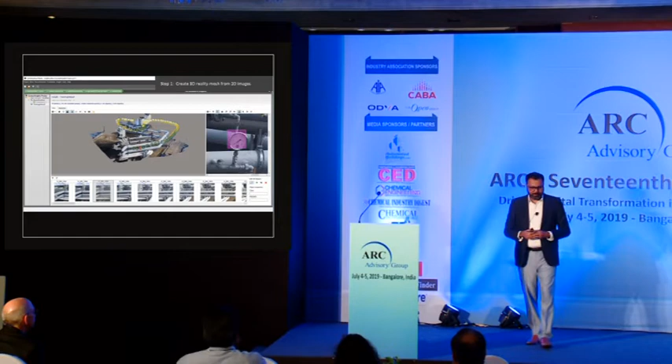And then we have added artificial intelligence and machine learning on top of it. What it means is now that I have a reality model, I train my system to identify objects and classify them correctly. So for example, what you see on screen is I'm defining a volume and saying this is a butterfly valve.

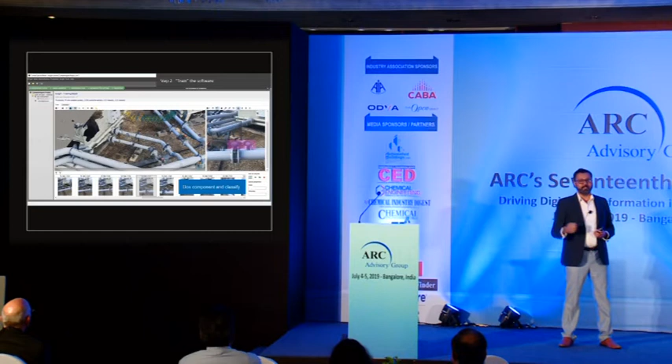So I'm defining it's an asset class - it's a pump, a valve, a control valve, a pressure indicator - and I train the system to do that. Once that's done, and I use machine learning to train my system, then the system automatically goes into the model, starts reading and getting information from that.

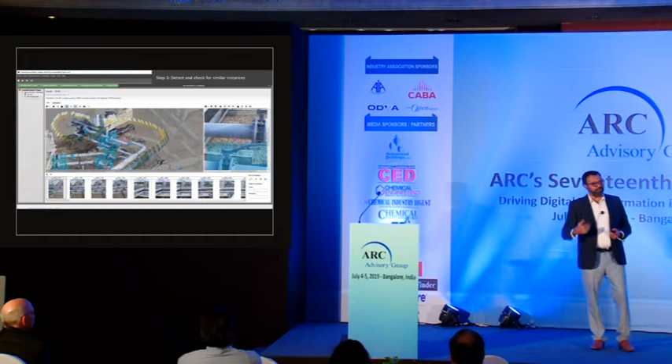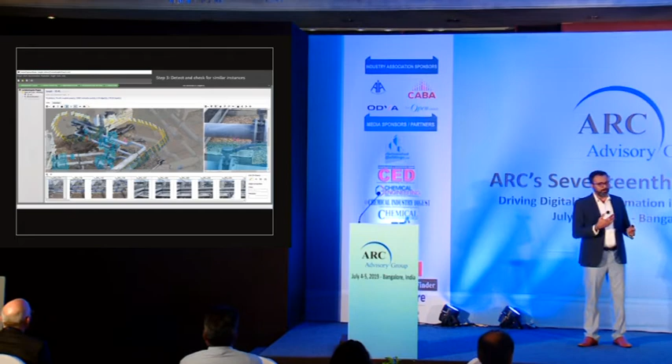Now it understands I am a valve, okay? It understands I'm an equipment, but what is my tag number? What's my functional location? So there we leverage your nameplates and tags embedded on your equipment, extract that information and define an asset object to it. So now we know what object it is, we know what class it is, and that information is tied back into a digital twin to link to information coming from various sources.

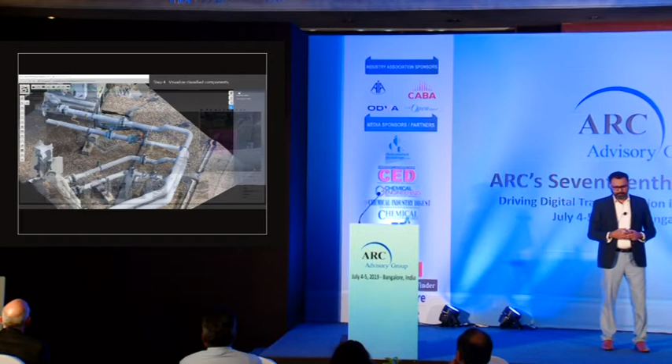Here's an example of that classification happening. So I'm on a reality model. I can look at a butterfly valve and the object selects everything you see, it shows me in pink. So that pink shade is all the butterfly valves which the system automatically scans and identifies back.

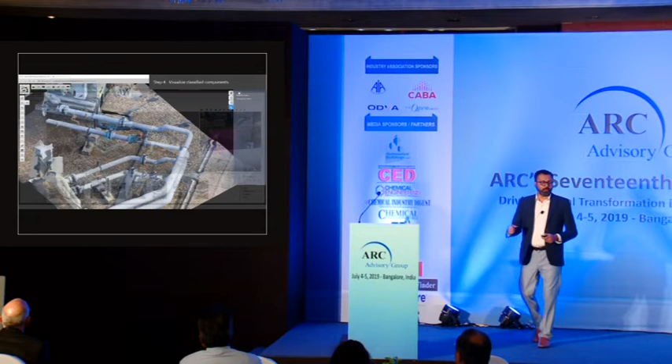So once I have my digital twin information and information extracted from these silos, then comes a point of aggregating this information. I can start with my plant breakdown structure. If it's a brownfield project, I can go to my CMMS systems, my SAPs, to bring that plant hierarchy. So I have a ready-made hierarchy I can start using, and then start aggregating information from various sources back, for example data from a P&ID and 2D information from a vendor data sheet.

It will be able to match and compare information. If there's some data inconsistency, it will highlight it and generate reports, which I can use for decision making in terms of what information is correct, which becomes a master source and which is to be brought into the system.

So now at this point, we have created a baseline of a digital twin. Let's talk about the various use cases, how I can use that digital twin.

It starts with a design review environment which allows you to review your facility. So what you see on the screen right now is a hybrid model - a combination of a 3D model coming from Bentley, AVEVA, or Hexagon technology, and a reality model which we captured using photogrammetry or drones.

They're intelligent in the sense that I can look at an object, because I've created a digital twin and aggregated information, I can see all my operating conditions. I can go and start looking at information coming from my sensors directly on this model, and I'll show an example of that as we move forward.

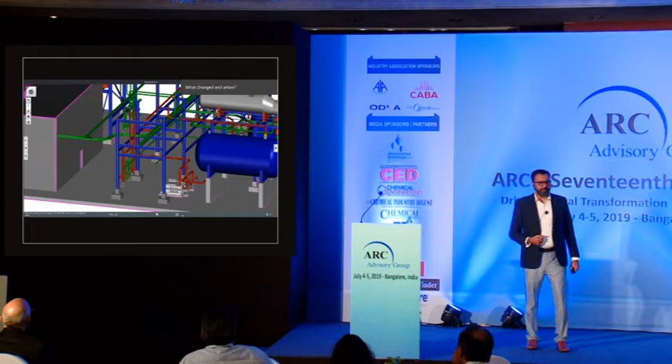More importantly, because you are running a lot of MOCs in your plant, you'll be able to visualize what has changed in your plant over two time periods or two milestones. So I could query two of the MOCs which have happened and see what has changed, whether it was a new addition, a change in property, a change in characteristics, or if I added a new process line - in this case a new bypass pump assembly was added - I could see what happened on those MOC changes.

So it's not just about showing you the final as-operated status, it can also help you go back and look at what has changed, what were the drivers for this change, which MOC resulted in that change, and look at who approved it. So it's tying your IT, OT systems all together and providing a visualization layer to look at that information more graphically than just a textual report.

Some more cases from an operations perspective: how do I leverage IT, OT, and ET convergence? How can I use it for my reliability strategies? How can I use it from an operational perspective?

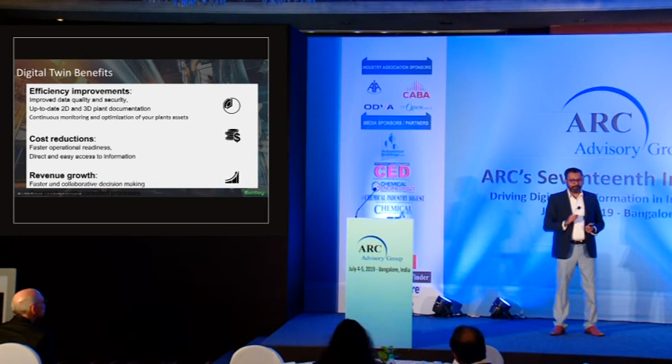Like the Institute of Configuration Management said, there was a report where they said if your information integrity drops by 8%, if you're not sure of your information by 8%, your employee efficiency drops by 50%. Because you're not sure what data you have, people go back and try to vet it by multiple sources. So what digital twin provides you with is the capability to improve my information, to ensure that the right information is available to the right people at the right time.

It helps you in faster operation readiness. It helps you in reducing your cost. And with PlantSight, what we allow is we allow you to enlighten your information which is today stored in your silos, as we call it dark data. It may be that somebody is leveraging that information, but only for a particular set of people. How do we make it available across the organization? How do I ensure people are able to leverage that information to bring value?

Like one of our AEP users who is using PlantSight talks about it: today my designer who is designing a pump does not really understand the value in terms of how that pump is performing in a real state, because he's designing in silo, the equipment goes into operations, and he does not know how it's behaving in the current scenario. With PlantSight, my designer also gets that leverage. He can directly go into a system and look at how my equipment is performing, and what to do to make it better when I modify and update the plant spec.

It helps you in increasing your reliability. It helps you from a maintenance perspective, and Anne-Marie talked about it. It helps you in faster collaboration, helps you in better decision making. And more importantly, it provides you information on your fingertips, whether you're using handheld devices, desktops, or mobiles, all this information is available to you on your fingertips.